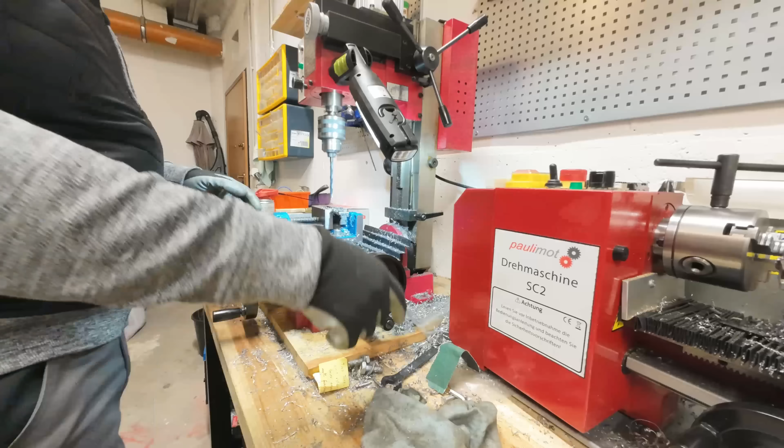So those who work regularly with these materials should wear glasses, mask, gloves, but I will tell you my example. I work with wood maybe every 2 months, and I don't really care about this. I will just cut that wood or drill or something like that. But with metal, I'm working at least weekly, and there I wear safety glasses and gloves, because I'm tired of always getting those chips in my skin, and they are really irritating. So you have to measure yourself, your risk, and act according to that.

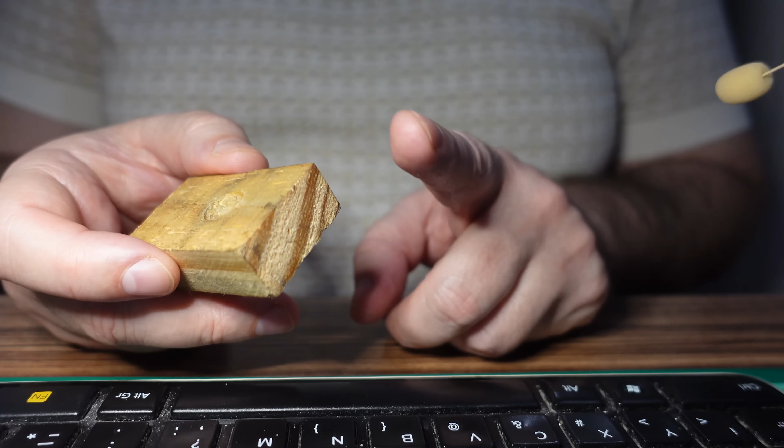Of course, if I cut or drill this carbon fiber material, I try to do it outside and I pay attention to the direction of the wind, so I will not inhale it. Just a quick question, would you rub the wood against your skin just to prove that you have wounds which will not heal? Okay, that's enough about this topic.

Let's see what's in the box. As you can see, both filaments are black, and the carbon fiber version is less shiny. We have the information about the empty spool, 0.24 kilograms. And there are some print settings, but this information is slightly different from that on the website, but I will start with the temperature tower anyway.

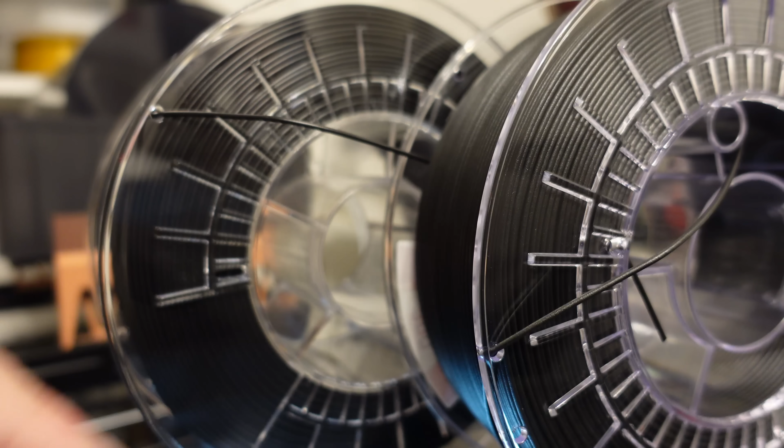Let's see how brittle the filaments are. This is polycarbonate, and I can bend it, it will not break, and this is the PCCF. Oh, I can bend it too.

Interesting. The surface is slightly shinier on the PC compared to the CF version.

Polycarbonate is inserted, and I will use the engineering plate with glue on it, and of course the printing will be inside the enclosure.

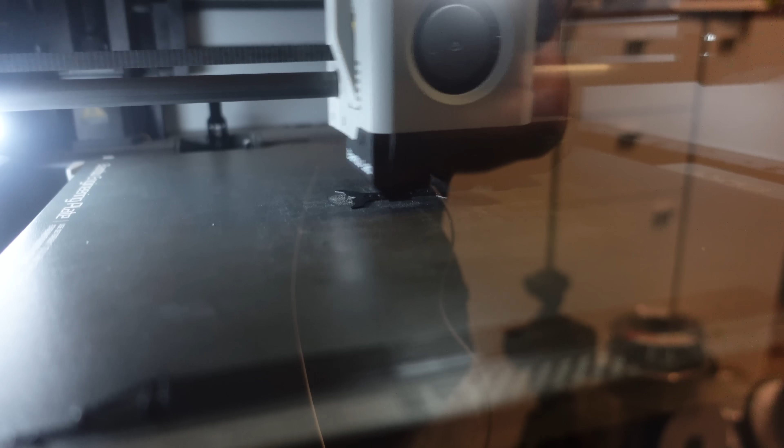Temperature tower from 290 degrees Celsius down to 260. The start is good. This is the first element at 290 degrees Celsius. First element at 290 degrees Celsius is finished, and now this is the second element, looking good so far.

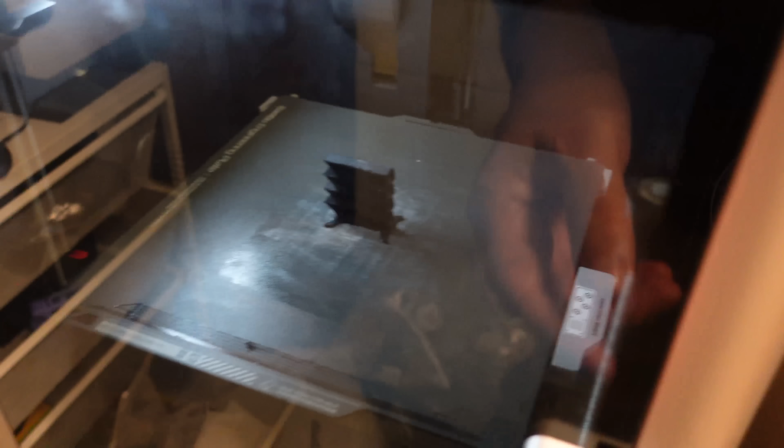There is no sign of warping. Printing finished a few seconds ago. Immediately, bed adhesion check.

Okay, it's good. I will wait until it cools down. The bed cooled down.

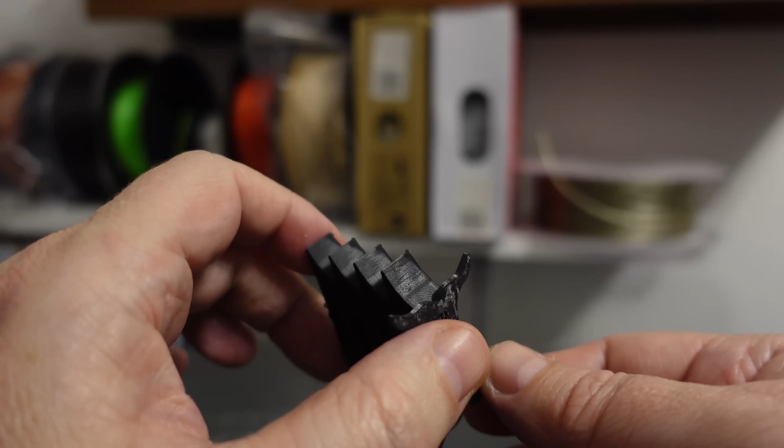The glue works perfectly. It looks nice, so my test objects will be printed at 290 degrees Celsius.

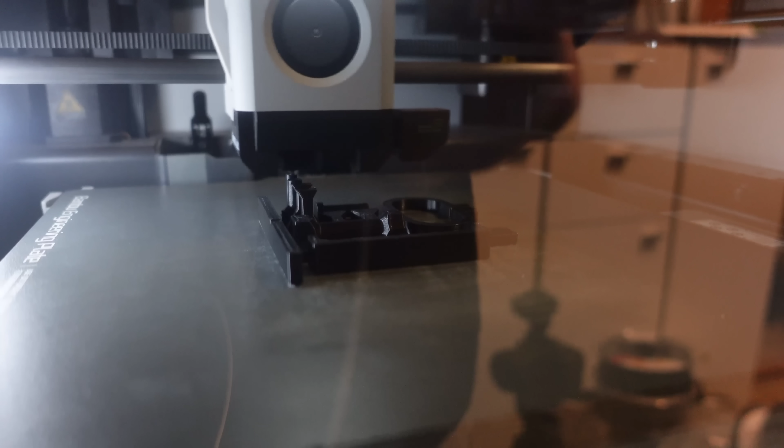Looking good so far, and the carbon fiber version will be even easier for printing. Last few vertically printed test objects, and I hope this is not too fast printing and I will still have decent layer adhesion. Each test object looks perfect.

I switched the material to PCCF, this time from 295 down to 265. It's finishing the second element, but even the one printed at 295 degrees Celsius looks fine.

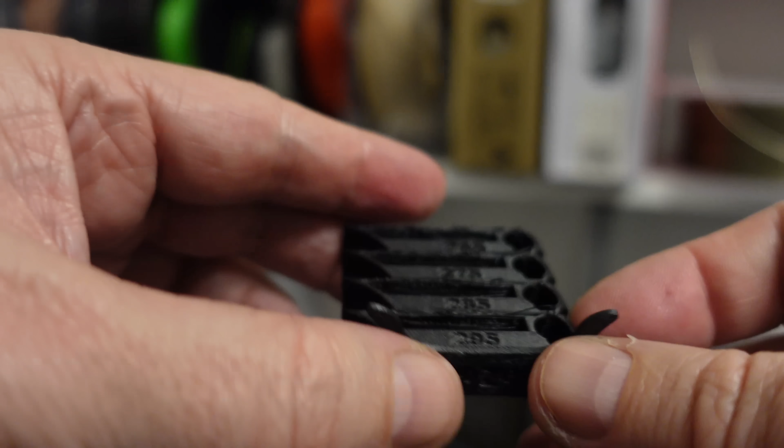Not bad, this temperature tower, but the bridging is not so nice, especially this one on top, but anyway I will print everything at 295 degrees Celsius.

In Slicer: nozzle 295, 12 mm³/s will be the maximal flow rate, and the same part cooling as previously. Looks like this printing will be fine too.

Last few vertically printed test objects. This printing looks really nice.

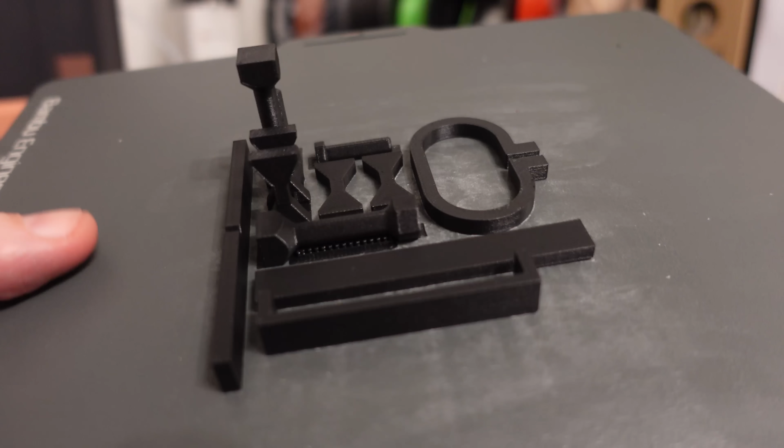I hope I will not mix them up. Theoretically the PC is shinier, but this is one of the shiniest PCCF I've ever seen so far.

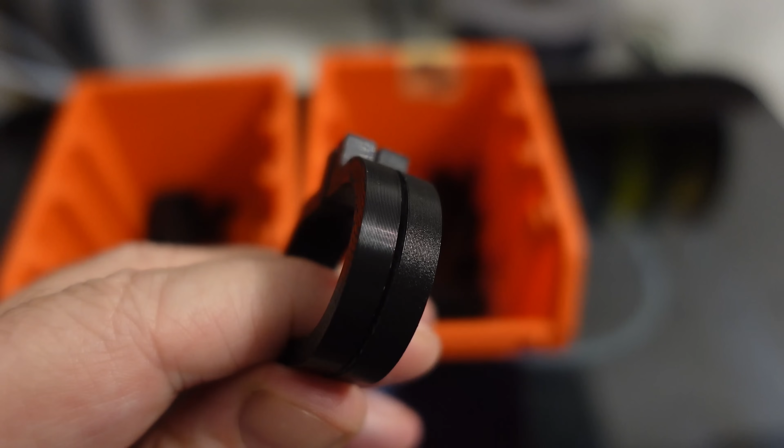The creep test: the deformation under a constant load of 1.25 kilograms. This is PC, and the carbon fiber version is marked with these white lines.

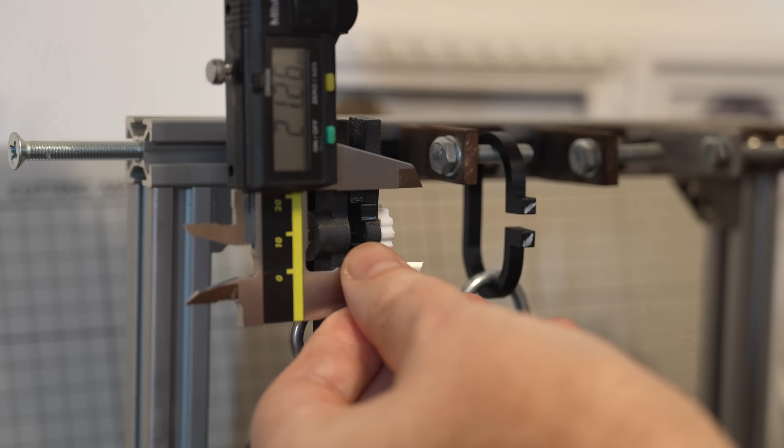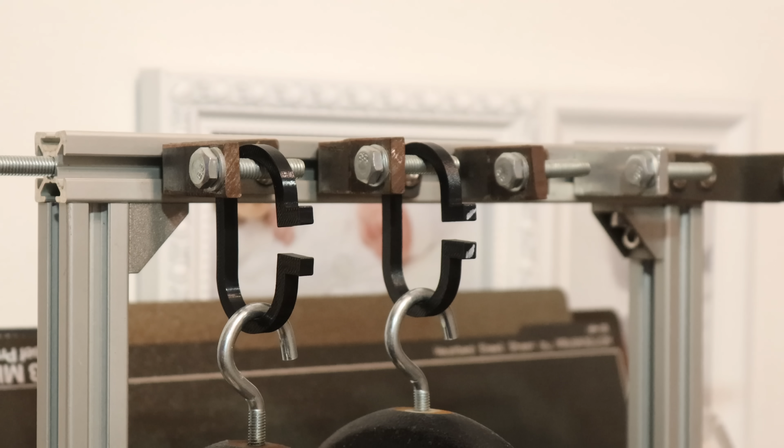So as expected, less deformation on the carbon fiber version. This is the last, fifth day, let's measure them again.

1892. 1591. Let's remove the load.

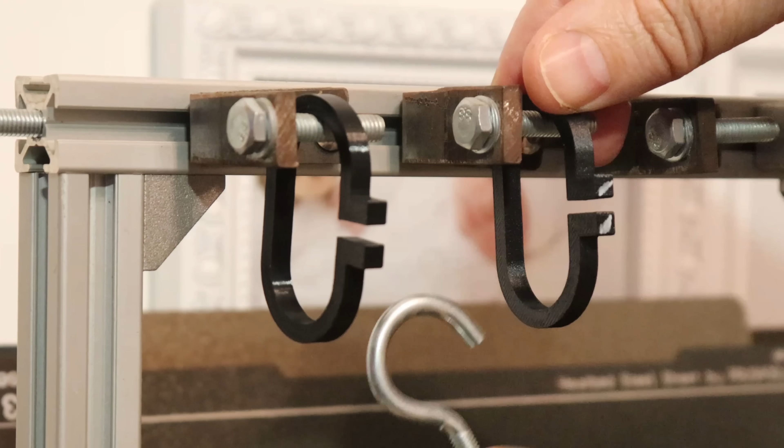There is a permanent deformation on both of them, but less on the carbon fiber version. So the PCCF had a smaller deformation, but what we need for the creeping is the difference between two days.

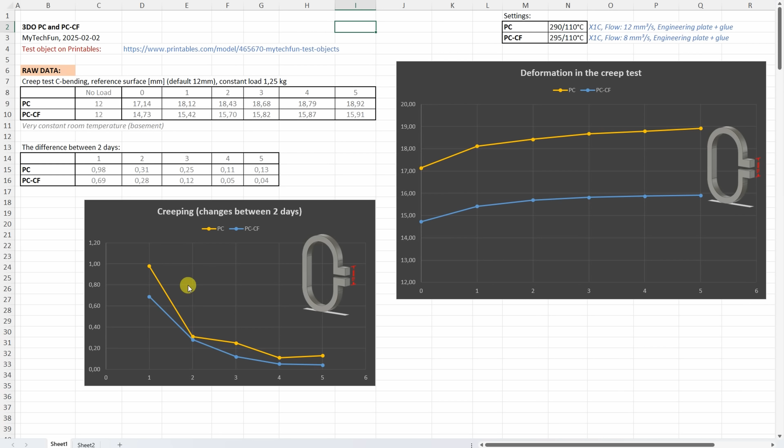And even here the PCCF was better, but in both cases I could record some creeping in the first 3 days. Only after the 4th day did it become negligible.

The tensile test: smallest cross-section area is 4 by 4 mm, and I'm starting with horizontally printed objects. 73.1. And now the carbon fiber version.

Very similar strength. And now the layer adhesion with vertically printed objects. This is good layer adhesion.

Let's see the carbon fiber version. Also very good. Pleasant surprise.

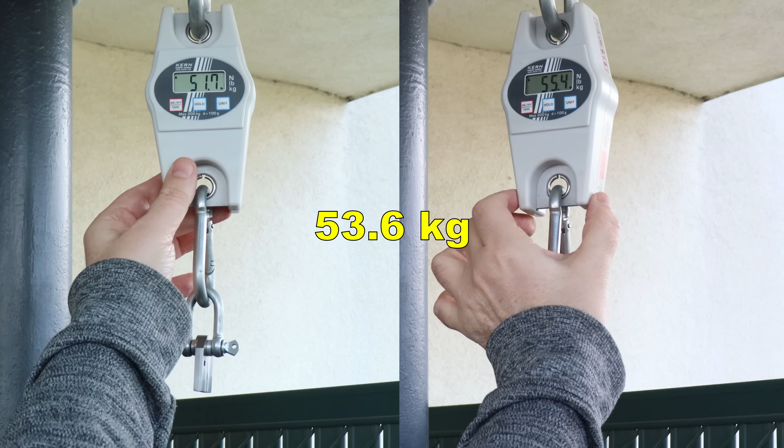I was expecting more on the tensile test, but this layer adhesion is extremely good, even with the PCCF version.

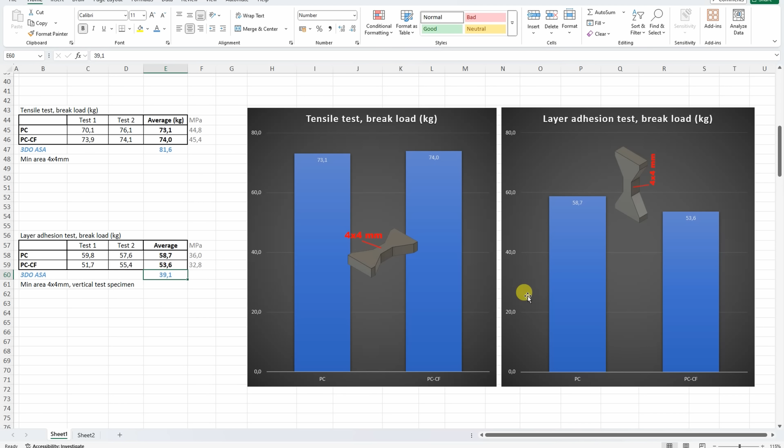Let's see the numbers. No big difference in tensile strength between these two materials, but for example ASA has a bigger tensile strength. However, the layer adhesion here is extremely good. For example, that ASA had approximately 40 kilograms in this test, so this is very good for these materials.

Shear test with horizontally and vertically printed test objects, and now I'm starting with the horizontal ones. Side by side, horizontally printed objects.

And printed vertically, where the layer adhesion is important. They are strong in both directions.

Now, I thought that the PCCF would be slightly stronger than the regular version, but the difference is not big anyway. On the shear test, it's interesting that the carbon fiber didn't help with the horizontally printed test object, and for the vertically printed one, where layer adhesion is important, again the regular polycarbonate was slightly stronger compared to the carbon fiber version.

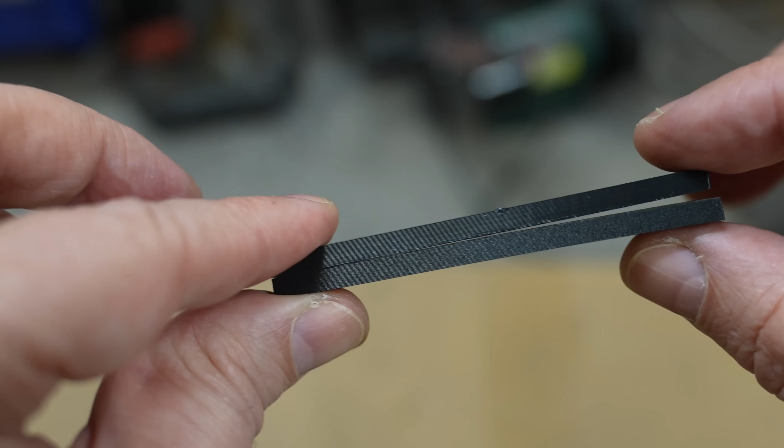3-point bending test where I am placing these loads one by one, and I'm measuring the deformation after 1, 30 and 60 seconds. This is a deformation under 1.25 kilograms. Under 5 kilograms, no big difference, but a noticeable less deformation on the carbon fiber version, and this is under 10 kilograms. Very noticeable permanent deformation on both of them.

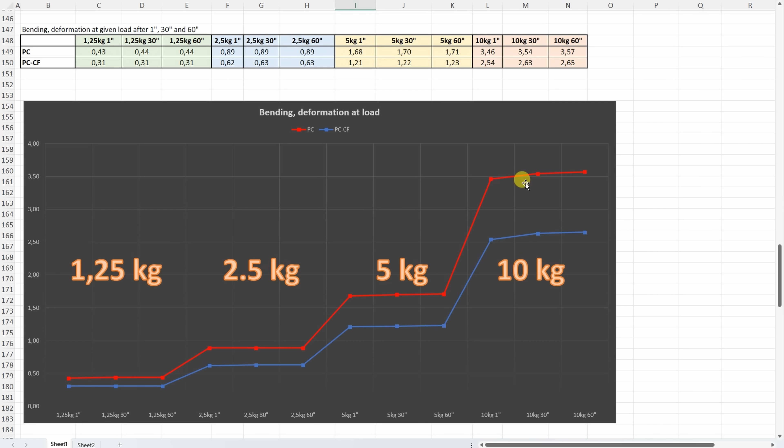Again, the PCCF was stiffer, and up to 5 kg this is not big load for these materials. On 10 kg I could record some changes during the time, so this is on the edge of the maximal possibility of these materials. Torque or twist test with horizontally and vertically printed test objects, and I am starting with the horizontal ones.

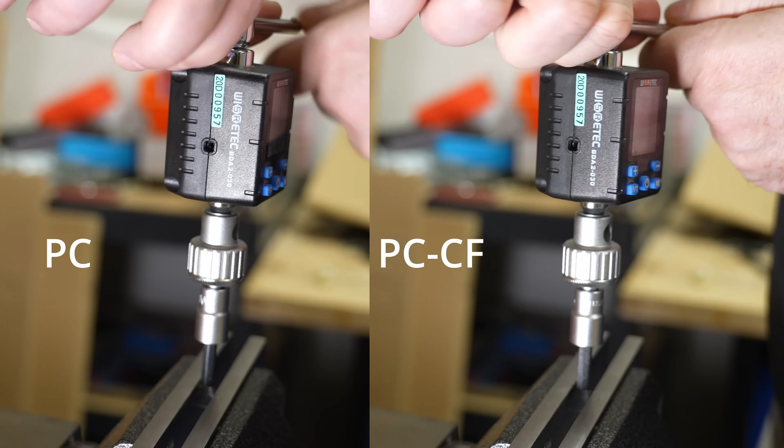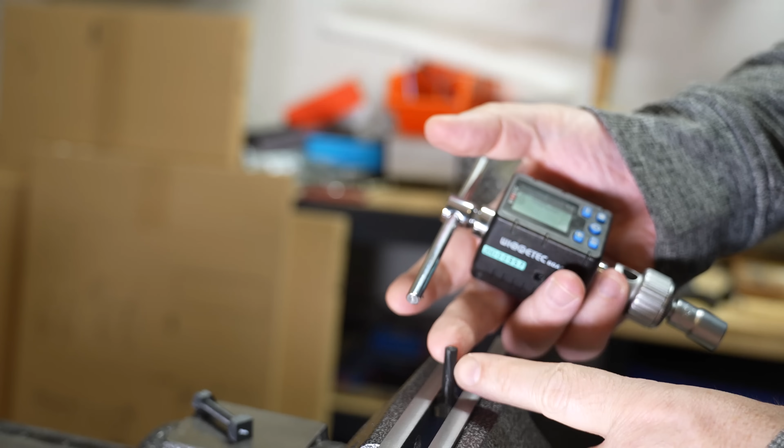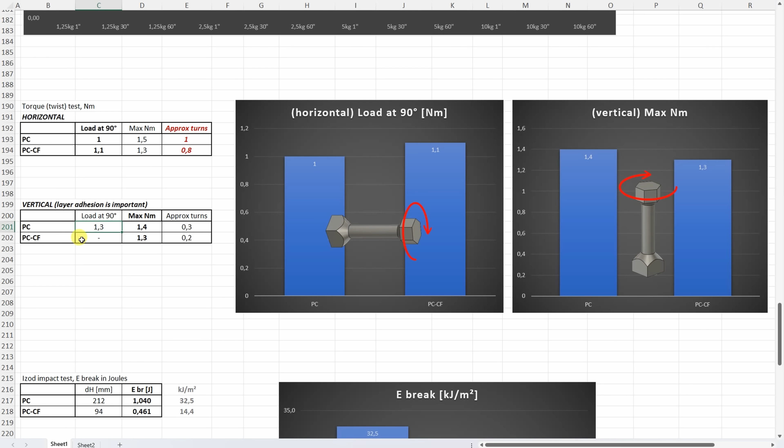1.1, 1.3 the peak, 1.5 the peak, 1.3. Usually I cannot make 90-degree rotation. More or less similar numbers, but different break types. No big difference between these two materials. Only big surprise was that I could make a more than 90-degree rotation with this vertically printed object from the polycarbonate. Impact test with this half kilogram hammer.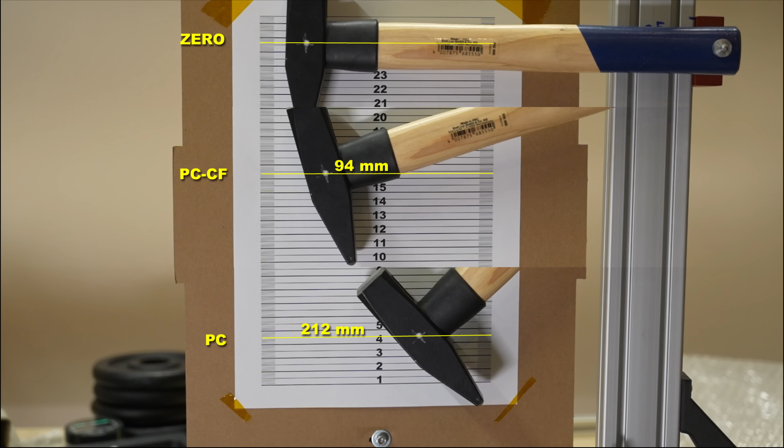This is regular polycarbonate. 0 position. PCCF. Looks like we have a tough polycarbonate, at least the regular version, but let's analyze the footage. These are edge positions of the hammer, and both filaments are extremely tough materials, even PCCF, one of the toughest carbon fiber reinforced materials I tested so far. And here you can see the numbers converted to kilojoules per square meter.

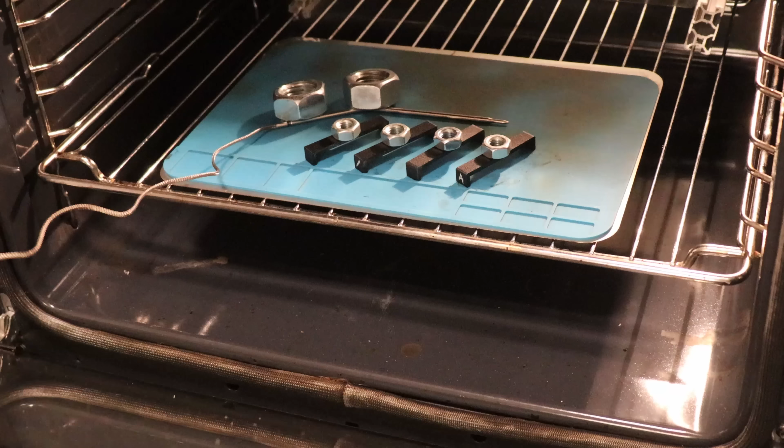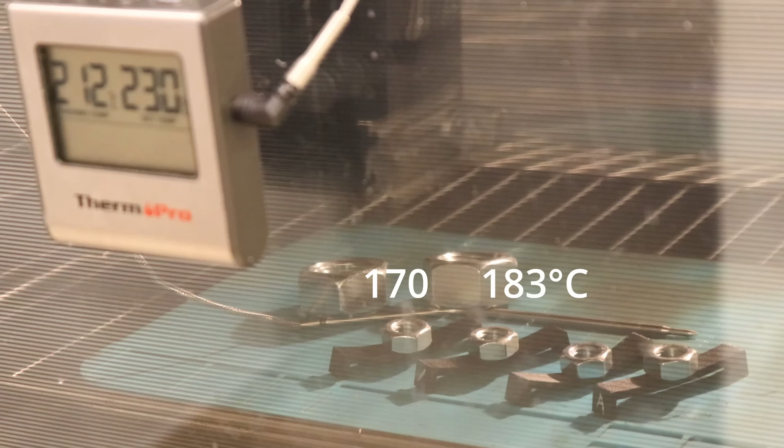Temperature test in the oven, and these are 2 filaments from this video. This is a sped up time-lapse video. At the beginning nothing happened, and the first deformation I noticed on polycarbonate at 170 degrees Celsius, and very quickly after it, at approximately 183, the carbon fiber version started with the deformation. I stopped the experiment at 220 degrees Celsius and I checked how flexible they are, and in both cases they are quite soft now.

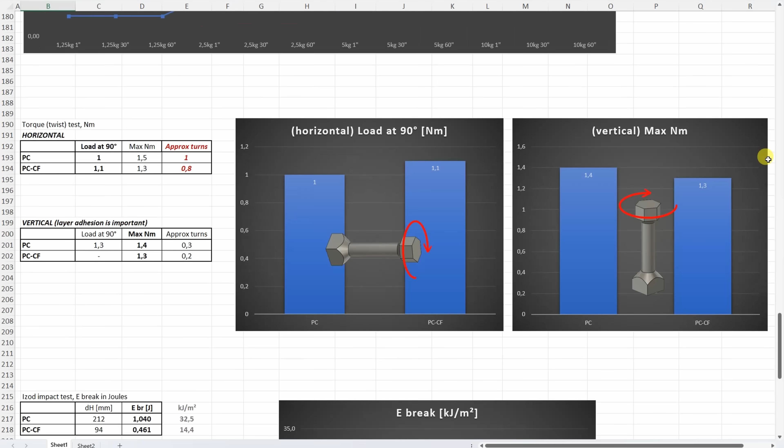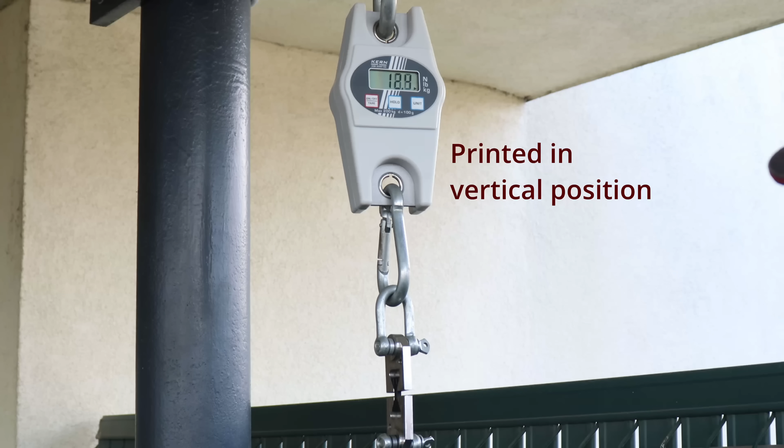And now some conclusions for the end. Very interesting, tough materials, both of them, and with a great layer adhesion. And this is important for me when I'm using technical filaments. Now on the other side I was expecting a little bit more on the tensile strength and a little bit more stiffness, especially from the carbon fiber version.

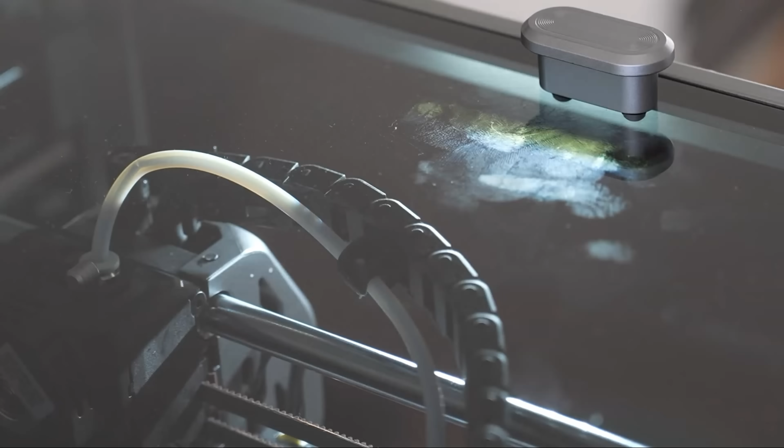I already mentioned the filament itself is not brittle, I can bend it and it will not break, even the PCCF. And this may be an advantage for printability, because it will not break inside those longer Teflon tubes inside the Core XY printers. I had that accident several times earlier when using very brittle filament and it broke inside those Teflon tubes when they were bent too much.

Now don't forget that I'm testing only mechanical properties at room temperature, but these materials have other advantages too which I'm not testing. Chemical resistance or mechanical properties in very low temperatures. Actually for this I'm preparing an experiment, but in this video it is not tested. Now I think the biggest disadvantage of this material will be its price, but I believe that this is the price we have to pay if it is made in Europe.